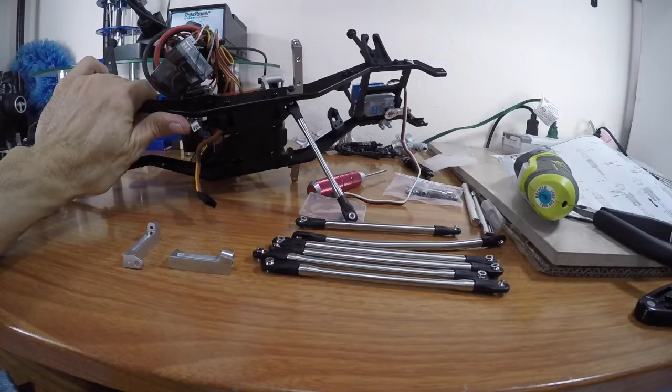Okay guys, so these are the next things you're going to be putting on there, and these are for your rock sliders. The one on the right side, you have to put the link in when you install that piece. On the left side of the vehicle, there's not going to be a link, so you're just going to install it without a link on it.

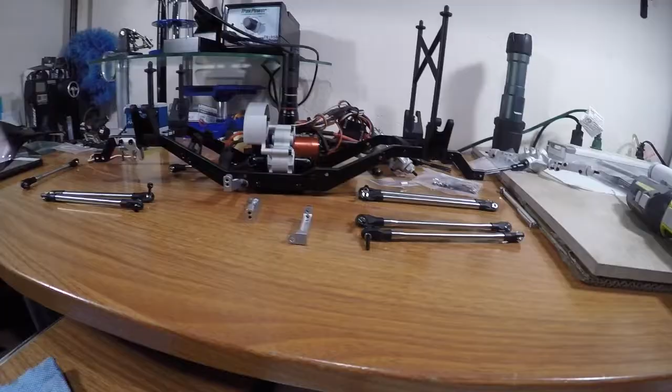Okay, so the next step here is I'm going to mount all the links, the axles, and the shocks. I've got everything already laid out. I'm going to go ahead and also install the rest of these last two pieces, one on one side and one on the other side.

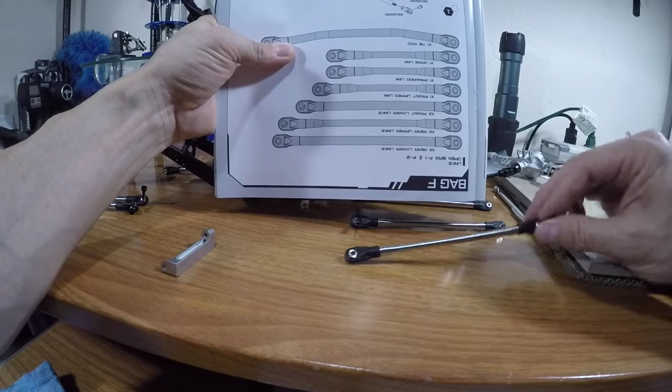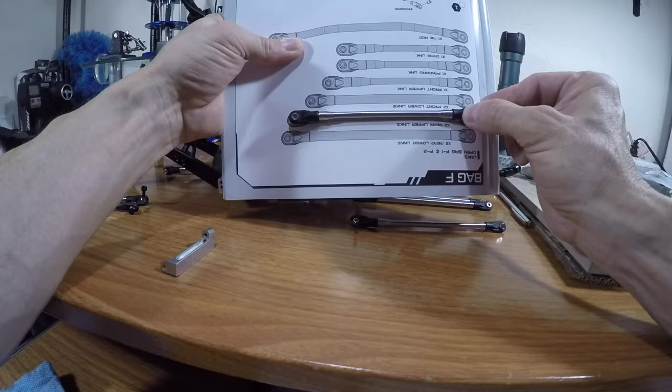Just in case you're wondering, the links are actually here in the book. Once you get all the links put together, you just measure it up and you'll see that's the proper size. Your rear upper links is going to be this one right here, and your rear lowers are these here.

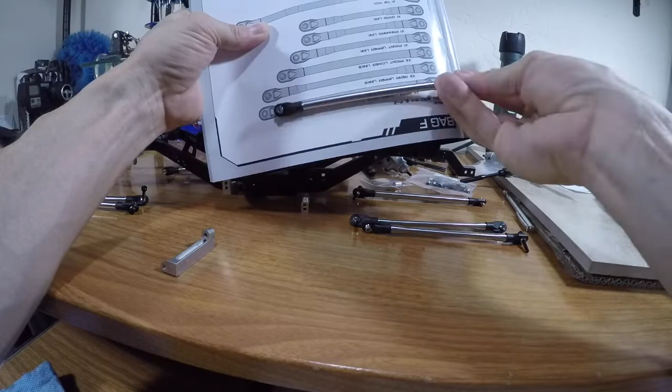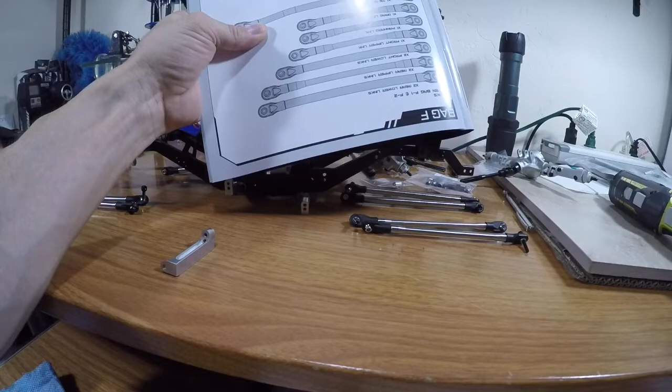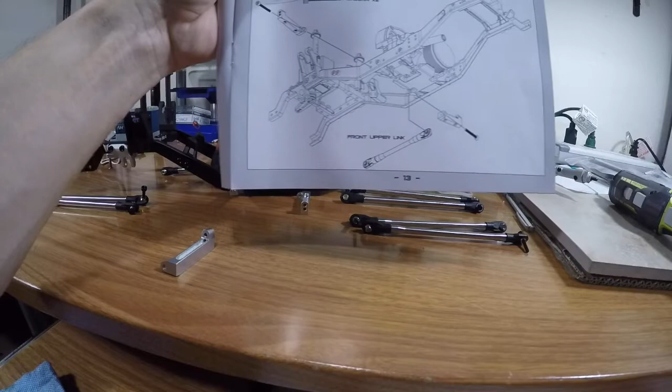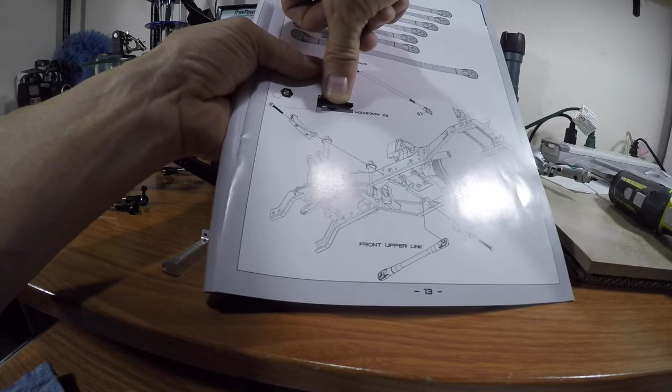Also, another thing I should point out, all these screws are usually the sizes they already say they are. So an M3... I don't have an M3 20, I already used it probably. Let's see. No, here's one right here. If you put the screw up to the picture, I don't know if you can see that, but if you hold that screw up to the picture, you can see that's an M3 by 20 millimeter, exact size. That's another thing that will help you out throughout this build, just in case you didn't know.

Alright, so I'm going to get this thing put together, and then I'll come back and explain what I did.

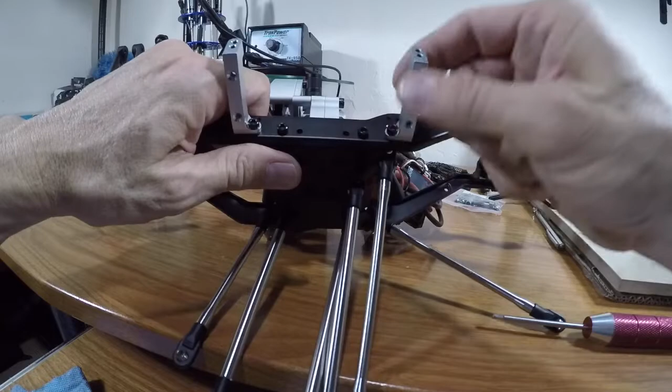Okay, so I got all the links on there. These are your lower links, they mount right here. These are your upper links right here, and they're mounting right here, through this part that's going to connect to your skid, and then right in through here. There's a slot where it mounts in through there, if you can see that, right in through there. It does that on both sides.

And then your front, you have your two lowers right here, they go in here. And then you have your one upper. Since we're running a Panhard system, you only have one upper link. And then all these are going to mount to the axles. So next I'm going to put the axles on here.

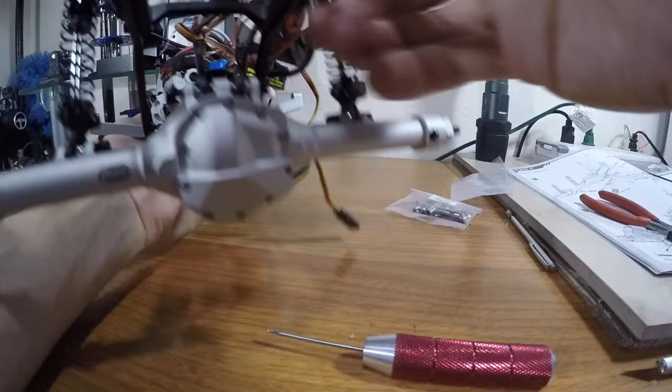Okay, so this stuff's all pretty much mounted, most of it anyways. Your shocks mount on this outer part of this axle here. Your lower links are going to be down here on the lower part. Your upper links definitely right here, like normal. Shock on the outside, link on the inside. Drive line, just stick it in there, it should go right in.

Your top shock mounts are right here, so that screw's an M3 by 20 millimeter. And that's the way they mount all the way around, front and rear.

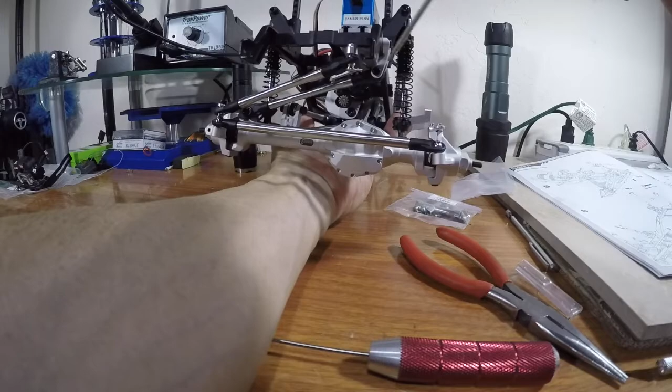Okay, and then the front, I'm still not done with this yet. I just got to mount this front piece here, this link, the drag link. Actually, the drag link is up here, so the drag link is mounted. The tie rod, I still need to mount that.

So you've got your upper link, I don't know if you can see it, it's right in here. It mounts to this piece, the top of it. Then, actually from here you might be able to see it better. So your upper link is going to mount right there, lower link down here, shock right there.

Now on the other side you don't have a link because with the Panhard system it only has 3 links, so you just have your lower, that's it. And we'll be back with the rest of it.

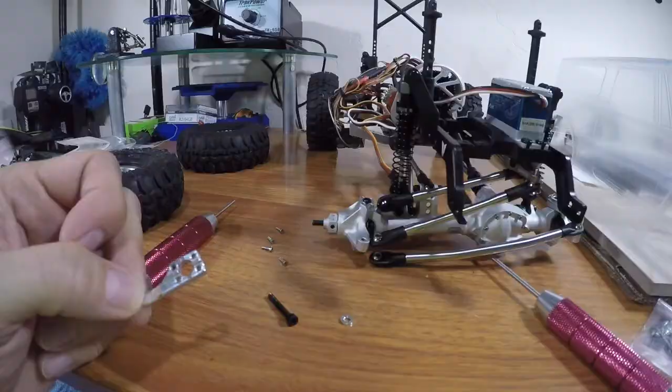Okay, so it turns out that I had these high steering clearance mounts on upside down, and I had them on the wrong side of the vehicle. So somebody pointed that out to me, which I thank them a lot for doing that. So if you're watching the build video on the axles, if you followed what I did, then you probably have them on upside down. If you followed the book, which is what I should have done in the first place instead of assuming, you will not need to worry about changing yours around.

But, these have a notch at the bottom here that goes into the groove right here on the steering knuckle. So you just place that on there and it snaps into the groove, then you'll put your screws on.

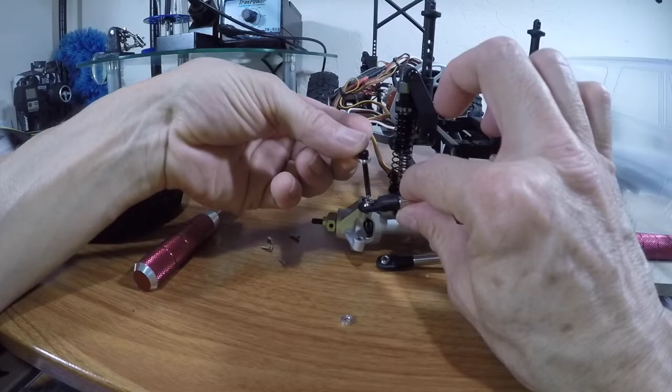Well, actually, let me show you something else. It's easier to put this on if you have this off first. You can thread the screw through the top and then through your drag link. Then you put this spacer in there, and then the tie rod goes on it. Then you just screw everything in.

Put these 4 screws in the top of here and screw this in, and you're good to go. The other side will be the same way. The only difference with the other side is you got a bigger spacer that goes in between there. So that will resolve that problem. Thanks for watching and stay tuned for the next step.